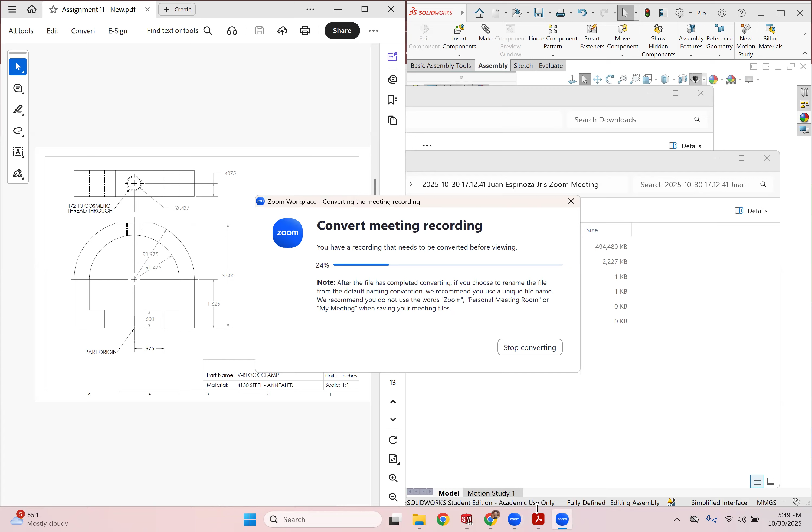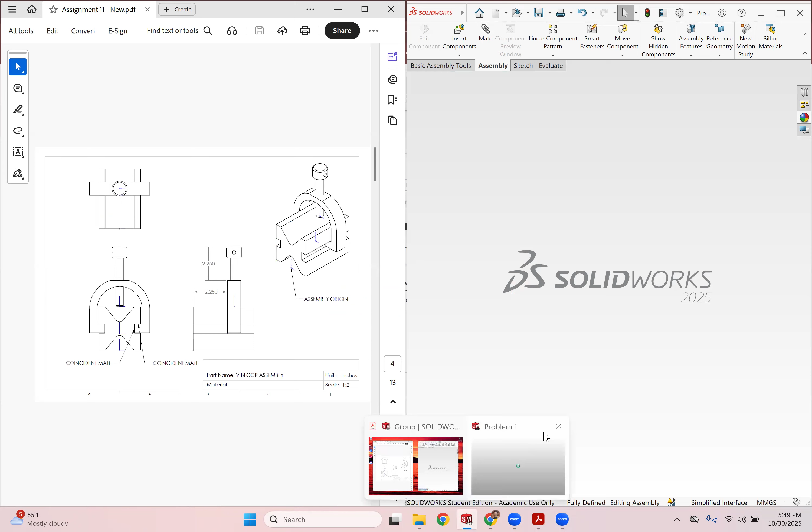Okay, so we can continue to problem number 2 now. I am able to minimize this stuff. Let me get set up here by closing problem number 1.

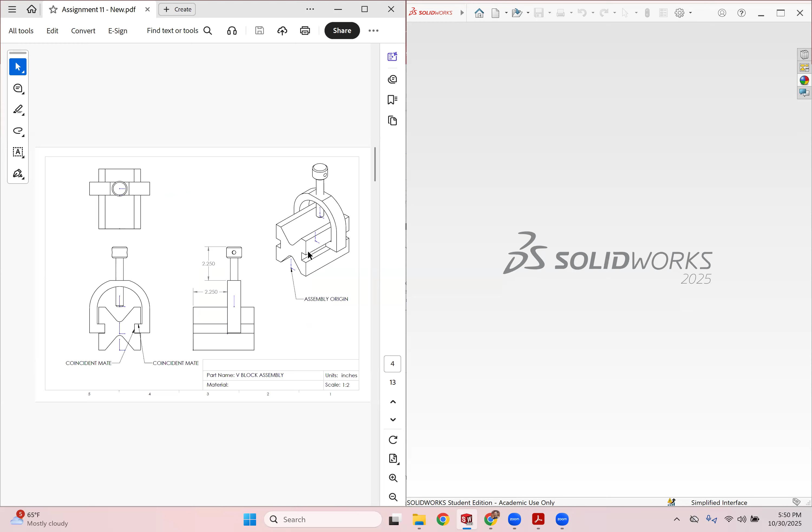So problem number 2 is a little bit different, right? We don't have our parts included or given to us, so we have to create them. So for the first part of this problem, let's create the necessary components, and then we can add them into a mate. So we do need to create the block, the slider, and the pin, or the clamp in this case.

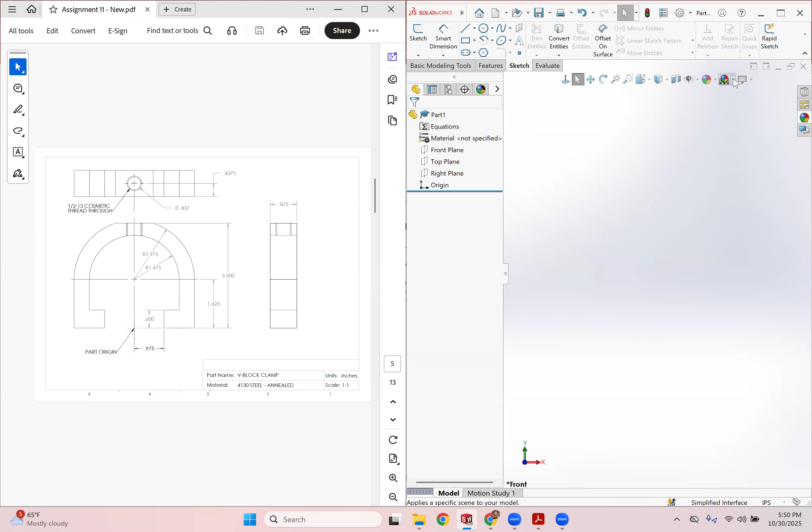So we'll go and create a new part file. Let me just make sure my settings are good for the recording. Cool. So if I make a new part file, our units are in inches, so let's make sure we apply inches rather than the metric system. Again, I like a plain white background. I should find a way to keep this as my default. I'll look into that later.

For this one, it's a simple part to make, right? We have one sketch, one extrusion for the base of it, and then we have a hole. So we should do a sketch on this front view. I believe it's already in the front view. Sketch on the front plane.

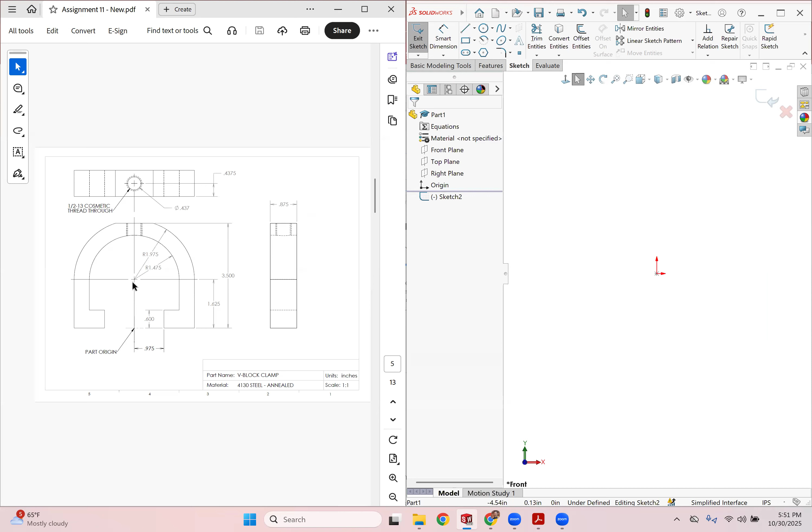And this is what we need to sketch. So I will select the center of this circle as my origin. So I can see there I have a circle.

Add a dimension. So the dimension here is a radius of 1.975. Now it's asking for my diameter, so I can do 1.975 times 2. So there's that, 1.975. I also have a second one, this one is radius 1.475. Again, times 2 for the diameter. All right, so those are those two.

I know from the, let's say, right quadrant, I have a vertical line. Now this line has a dimension of 1.625. Right, yep, 1.625.

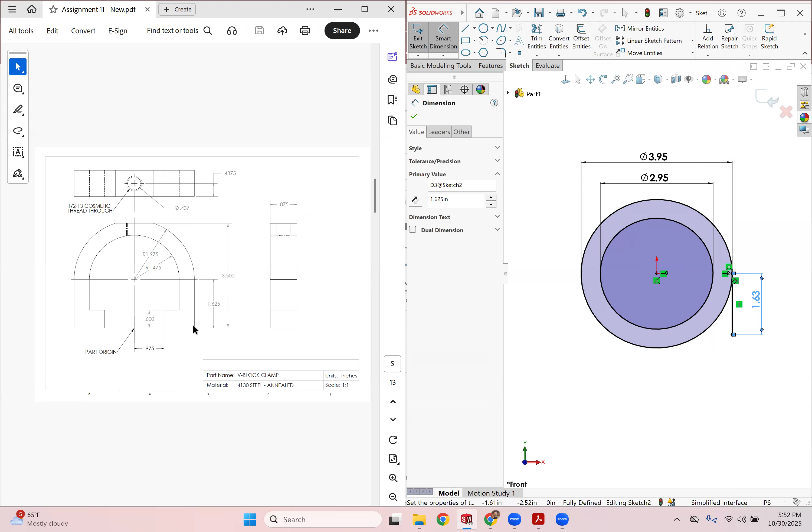I have an interior line. So from the right quadrant of the interior circle, again, it's a vertical line. And that one has a dimension of, if the total is 1.625 and we subtract 0.6, that would leave us this remaining distance. So for that, we should input, and again, if you don't want to do math, which in this case might be very simple, but if you don't want to, 1.625 minus 0.6, hit enter.

There's that distance. Now let's see, we have, can we find this vertical distance? Sure, we could by doing some math. So if we have this radius, right, 1.475, that would be the distance of the center, this point. Now, if that's 1.475, if we subtract this 0.975, again, that leaves us with our remaining distance.

So we can go ahead and create a line from the end point. Oh, my computer's lagging there. So we create a horizontal line this time. And again, that one would be dimensioned as 1.475 minus 0.975. And continue this with another vertical line. Now this one has a dimension of, I'll clean these dimensions up in a second, 0.6.

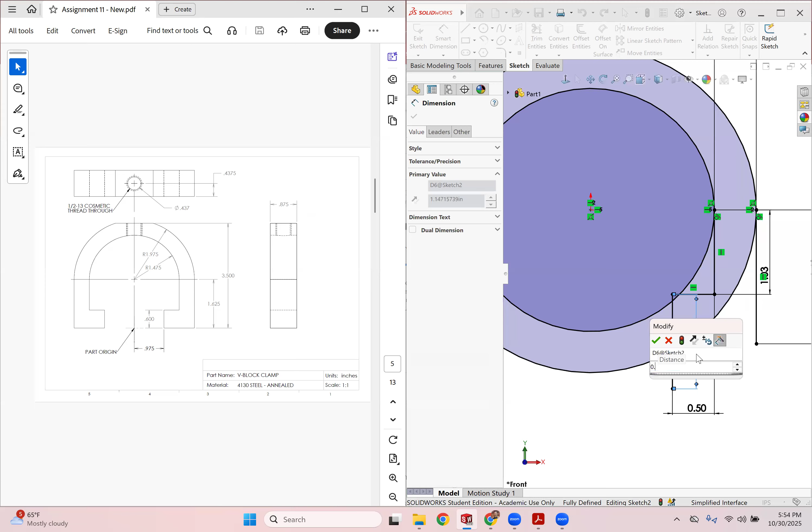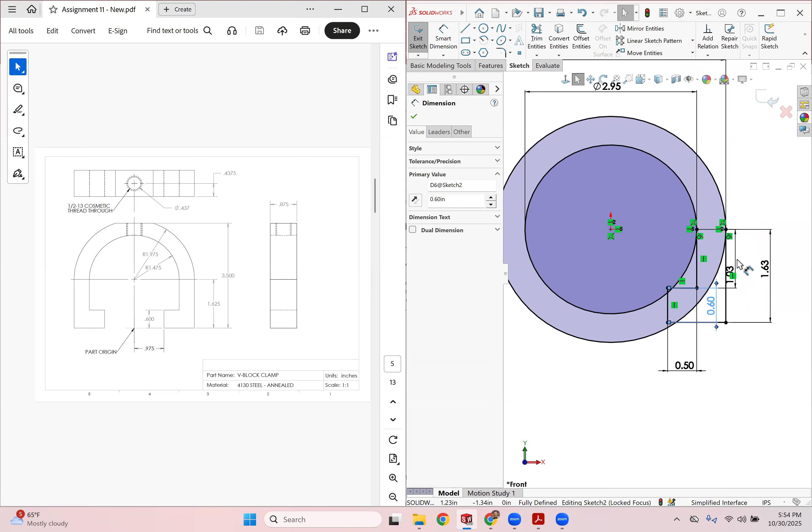Okay, then finally I can connect these two lines together. Move these around a little bit. All right, so that's the shape that I need, which basically means I could trim. What I don't, let's refrain from trimming first. What I would want to do is let's create this on the other side.

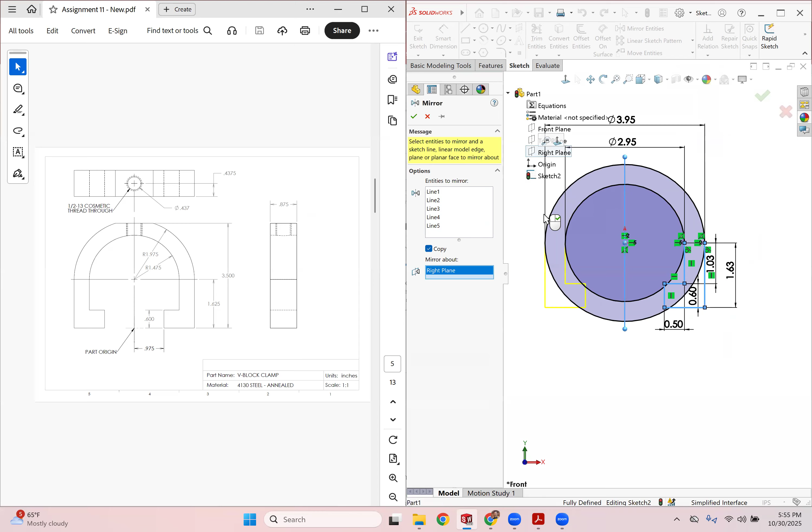Now you can do that manually if you like, or the smart way to do it would be with a mirror. So let's find my sketch tools. I'm in my sketch tools. Let's find mirror entities. Well, what do I want to mirror? I want to mirror this line, this, and this. This is what I want to mirror. Of course, I want to copy it so I don't delete the originals. And I want to find a plane where I can mirror this about. So if I hover over my different planes, in this case, it would be my right plane. I want to mirror these over my right plane, hit OK.

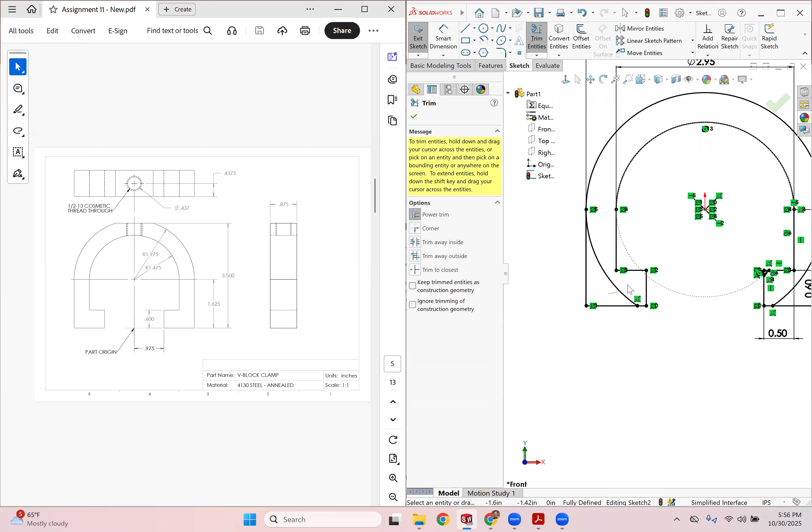Now we can trim. So let's find trim. Let's trim the power trim. I could trim that. I could trim here and there, where you get everything from there and there. Okay, so if you trimmed it successfully, we should have that finished.

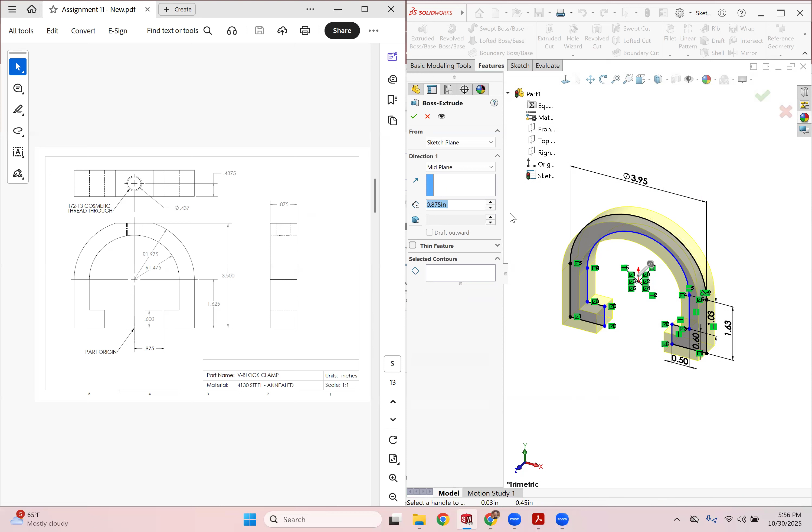Let's extrude this. So if we go to features, straight from our sketch, we'll go to features. I will extrude this the distance of 0.875. So we can do blind. We'll do backwards in this case of 0.875, or you can do mid-plane, which is fine. I personally would prefer that, that way we can keep some level of symmetry with our planes. If I do this in a mid-plane, then that means that my front plane is still symmetrical to the part, right? Splits it down the middle, which maybe not 100% required, but just to keep things kind of neat and organized.

I see a mistake I made. I forgot this flat top. So as always, you can go back into your sketch.

Let's go ahead and introduce that line. So see, it has a dimension of 0.35 - I'm sorry, 3.5.

So what I could do is make, let's say, a midpoint line, making sure I use the origin as a reference to make it vertical with that point. I don't know its distance, I don't know its size quite yet, so you can always just select something that works for you.

And then I can dimension this line vertically, right? I could either dimension it as this original dimension is from the bottom of the part at 3.5, or I could dimension it from the origin if I do a little bit of math.

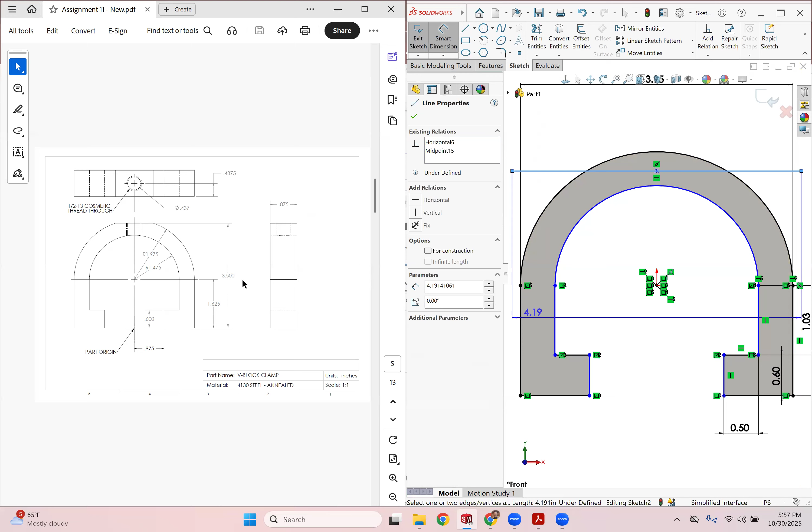But I'll keep it simple - let's just dimension it off the bottom of the part. Let's see, I would over constrain it. Okay, so this one should not change because it's over constraining.

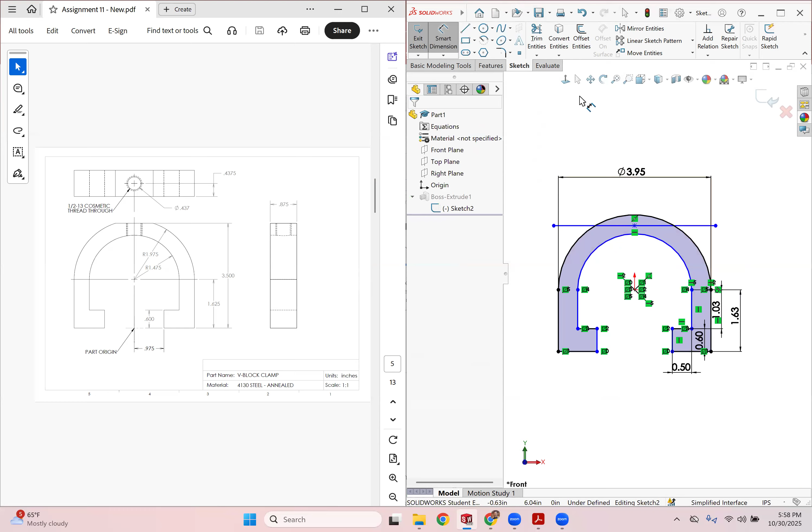Let me try - I want to try to maybe click on the bottom first and then the top. Might still be the same thing, which it is. Okay, let's cancel this, it's not useful to me.

What can I do? So this has to be horizontal and vertical. Will it let me dimension it from the origin? Maybe not. Will you? Okay, it does in this case.

So in this case, let's say we add the dimension from the origin. It would just be a little bit different, right? Instead of 3.5, we would do the total distance 3.5 minus the 1.625.

Just to verify that that's correct, which it should be, what you could do is just quickly check now the dimension, which is 3.5, right? But again, I cannot create this without over constraining that.

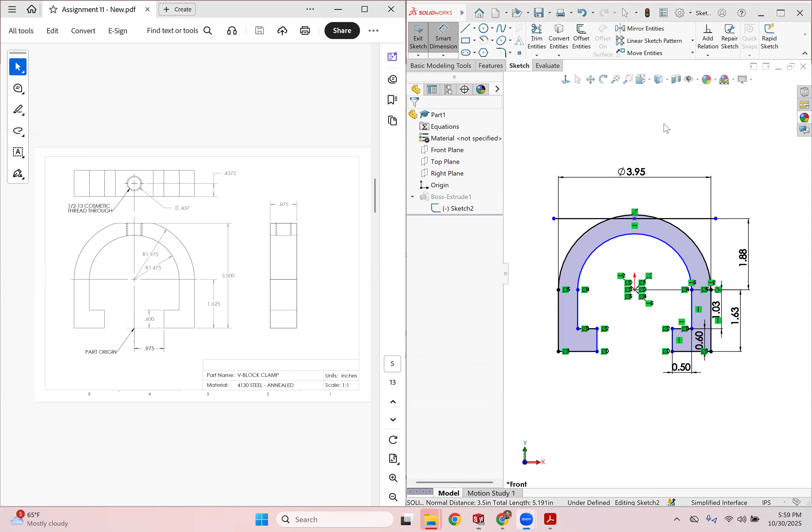So finally, again, just trim - now that that's in the correct spot, we trim all the unnecessary lines. Hit OK, try to back out. Cool, now I have that added in, right?

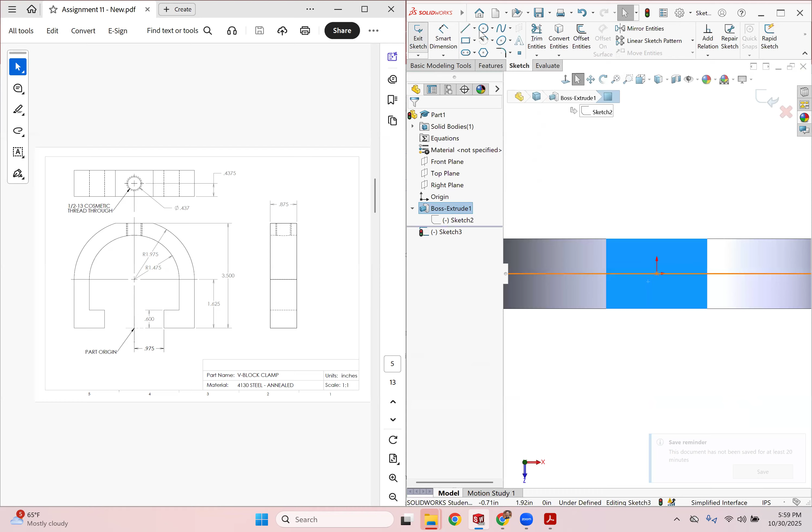And what I need to do now to finish up this part is the cosmetic thread through this hole, which I don't currently have. But if we did a sketch on this face - I'll do a new sketch on that face - we can create our hole by creating a circle about the origin.

This one should have a dimension of 0.437 in diameter. So there's that hole.

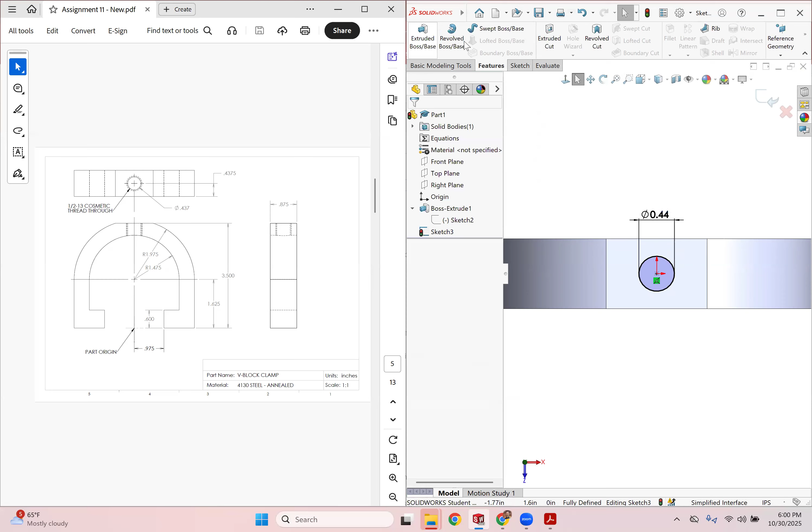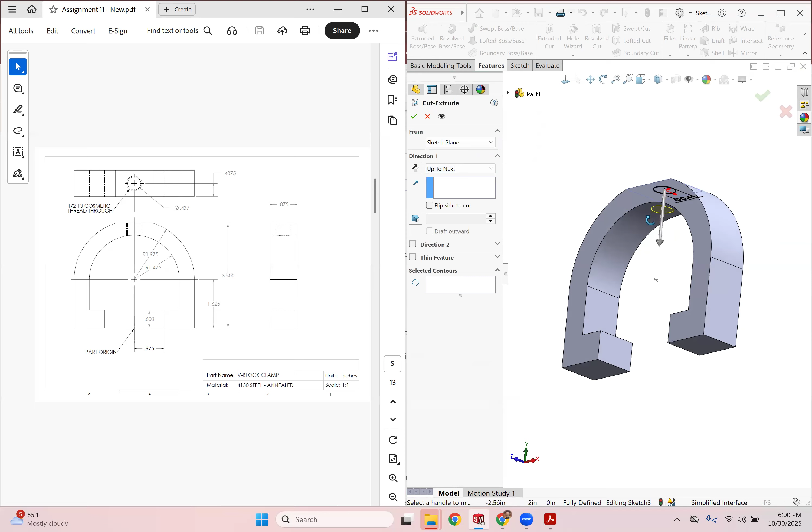Go ahead and finish this with an extrude cut. Now it doesn't give us a distance, which is fine. However, what we could do is enter a blind distance that goes all the way through at some point. My recommendation for this one would be up to next, so regardless of where that next is, it'll cut all the way through. So up to next works fine in this.

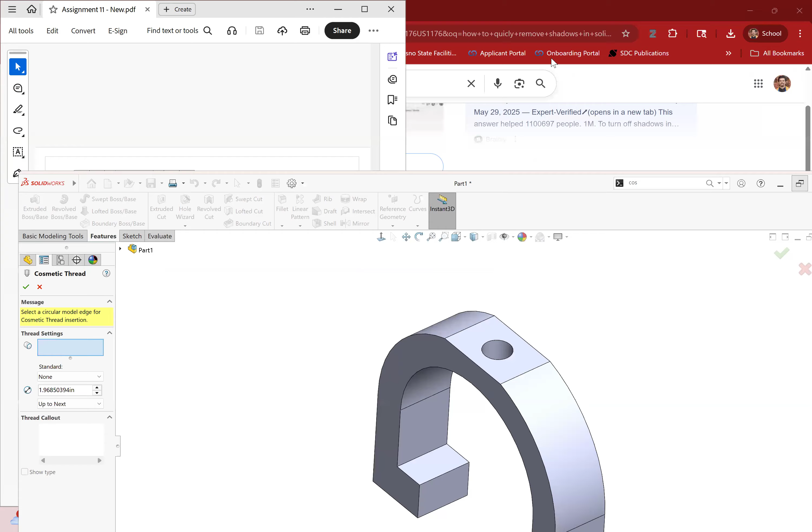Now I just need my cosmetic threads, which - let me go ahead and full screen this to type in, I believe there's an actual tool called cosmetic thread. Okay, now let me minimize this to put it back. All right, so this is my cosmetic thread tool.

What it's asking for me here is the edge of the hole. So this is the edge of the hole that I want to thread. Standard for the standard units should be - let's try ANSI inch.

Machine threads is fine. In this case, I have half by 13. Let me try to locate half by 13. It's not on here, it's only half by 20.

Let's try a different standard, maybe ISO, which is in metric standards. Let's find a standard that works for us. Maybe we could do none. No, that's not gonna work. That's also metric, more metric, more metric.

Let's go through these. Don't think it's gonna be a straight pipe thread. Half dash 13 - no, HeliCoil is not it. I don't even know what that stands for. KS, JIS. Let me find a standard that works for us in this case, and I'll get back to you.

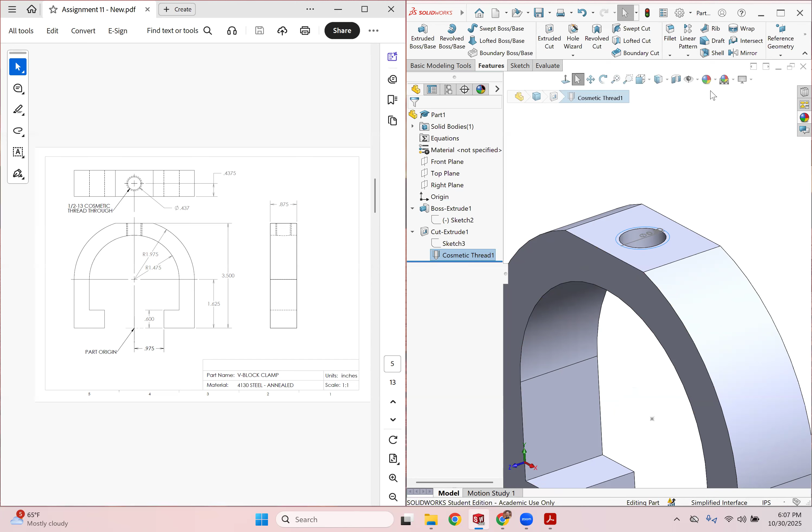So I believe that's it for this component. Let's go ahead and save this.

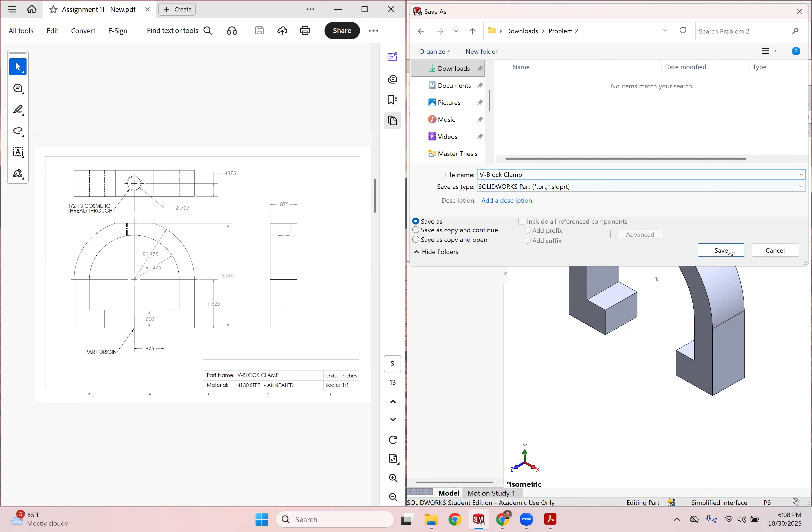Save this to downloads or somewhere that works for you. Make a new folder because we have a few parts to make here. Call that folder 'Problem 2' and save it there. This part is called the V block clamp, file number 2. Go ahead and save your work there. You don't have to close the other file if you don't want, but my computer is running low on memory, so to help me, I'm going to close that since we're done with it.

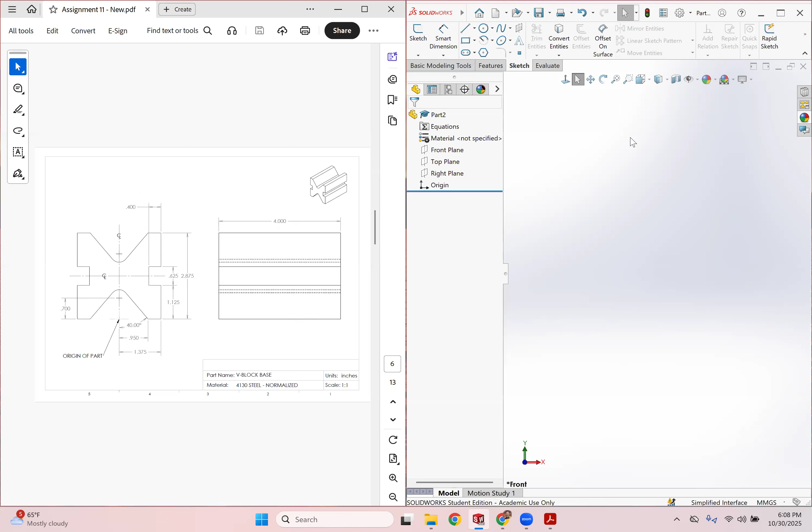Now let's make this part. Again, open up a new part file. Very simple component: one sketch, one extrusion, sketched from the front view again. I believe we already have a sketch on our front view, but just to verify, sketch on the front view again. I like the plain white background with no shadows. Let me zoom in here.

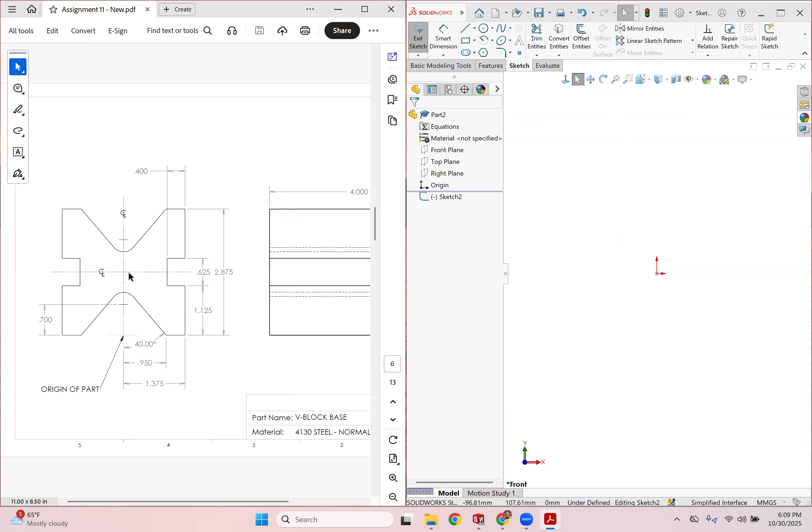Here's the sketch that I want to make. Again, I would personally select my origin to be in the middle, but it's up to you what you want to do there. So if my origin is in the middle, let's say I can start with these arcs. Do I know the distance? I'm sure I can find it somehow. Okay, it's going to get a little complicated, but I could find that distance.

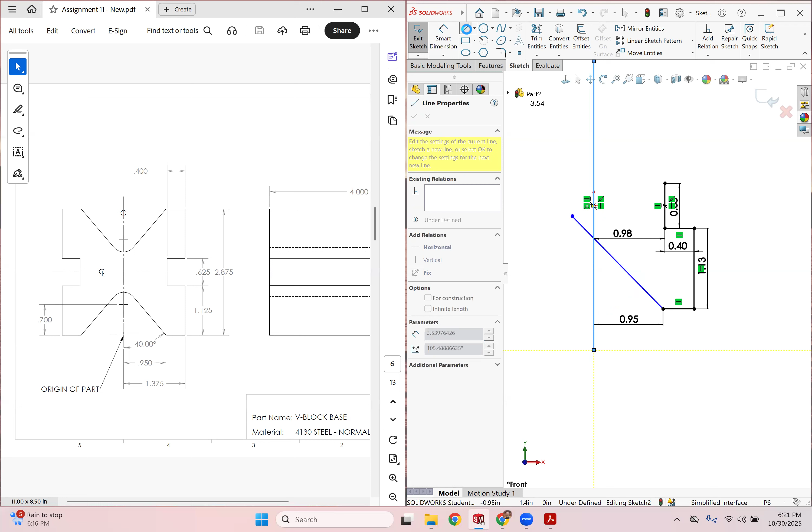So what we could do is make a reference line. I like to use a midpoint line in this case, and make sure it's vertical. Distance isn't really important, but what is important is that this line is for construction. It's just for reference, not actually a part of our drawing. We just need it, in this case, to add a dimension.

So this angle here should be 40 degrees. Very nice. And we need the same line in the opposite direction.

So I think for now, what we could do is finish the right half of this drawing. From here, we could basically just mirror everything. We've essentially made one quadrant, and in this case we have symmetry in the X direction as well as in the Y, so we can just mirror twice for that.

For example, let's say in this case we want to mirror this line, this one, and this one over the X direction. So we're going to mirror about... let's find the proper plane for that. So over the top plane in this case.

Now what we should do is mirror all of this over the Y direction. So for mirror again, this time I just want to quickly select everything. You can use your selection tools for that.

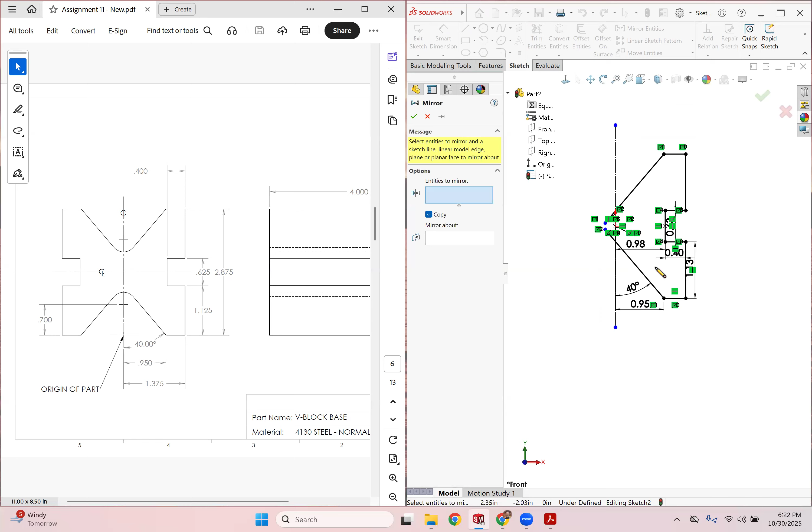Let's see, what line is this? I'm going to deselect that. The reference line isn't really too important to the drawing, so I don't need another version of it, especially if it's going to be in the same location it's at now.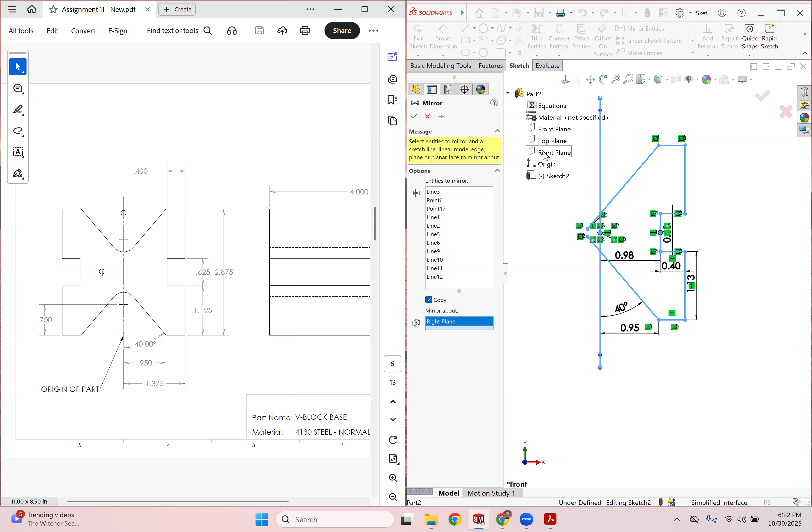We want to mirror this over the Y, so in this case the appropriate plane would be the right plane. Yes, we want it to be a copy. Finish that, and then go back in here.

Just to clean this up a little bit, maybe trim these pieces. Oops, I didn't mean to trim my reference line. So what I can do there is just extend it back into itself. We're one piece now. Sweet, we're one piece.

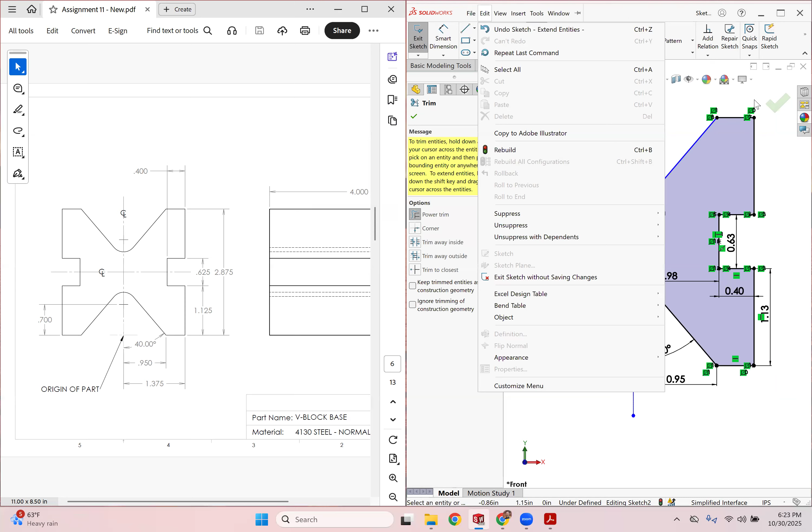What do we need to do now? Now we need to finish the arcs. The way I would do this is the radius or diameter is not explicitly given to us, but we can create a circle in this case on the reference line.

Now again, I don't know exactly its radius or diameter, but I do know that circle is dimensioned. I actually did this backwards — you don't start with the circle first. We could do, let's say, a point. We don't get to use the point too often, but we need a point here.

So somewhere along this line there's a point, and that point has a dimension of 0.7 from the bottom of the component. So this dimension here should be 0.7. Now we need this point so we can use it as the center for our circle.

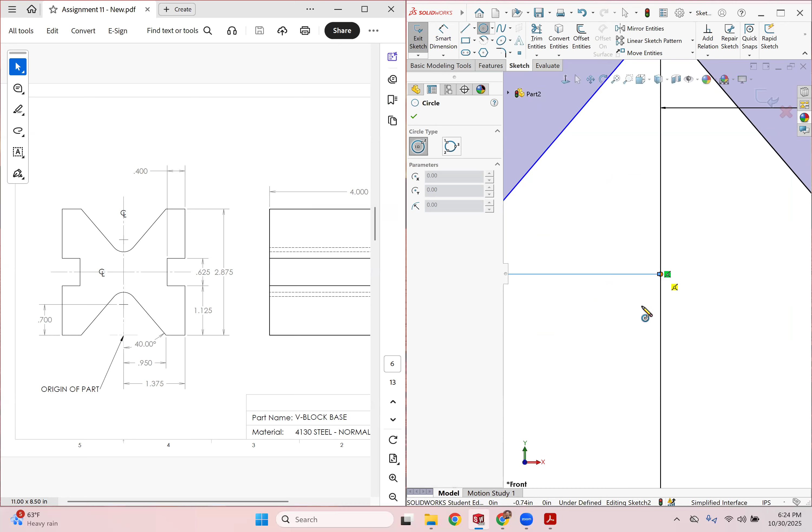Now that we have our point there, we want to make sure I lock onto that point. Now this circle, from this point, make it tangent with one of the lines that we created. Doesn't matter which one — since it's in the middle, it should be tangent to both at the same time. So this is the radius that we need, but again, it's not given to us.

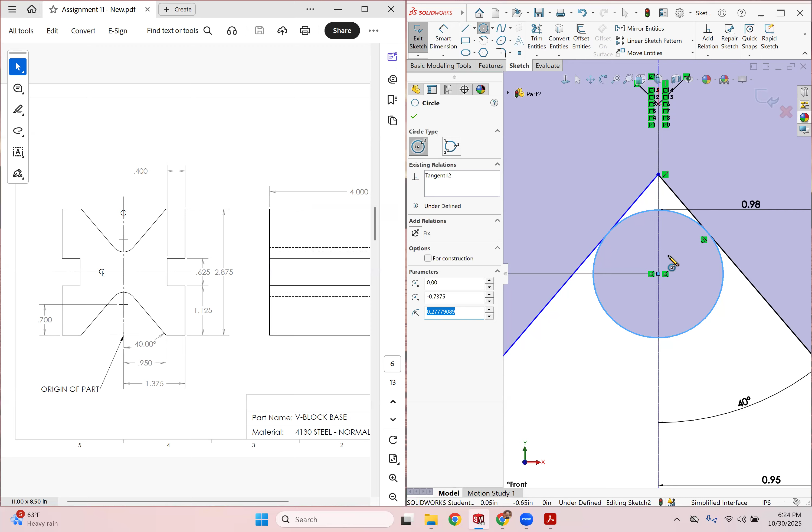So from here it's pretty simple. We just trim what we don't need — in this case these two pieces — and then we have our arc.

Now you could do that to the opposite side. Again, use your tools — a mirror would help us out in this case. We want to mirror this arc about what plane exactly, I'm not sure, but we can hover over them to find out. Over the top plane in this case. There you go. As always, trim.

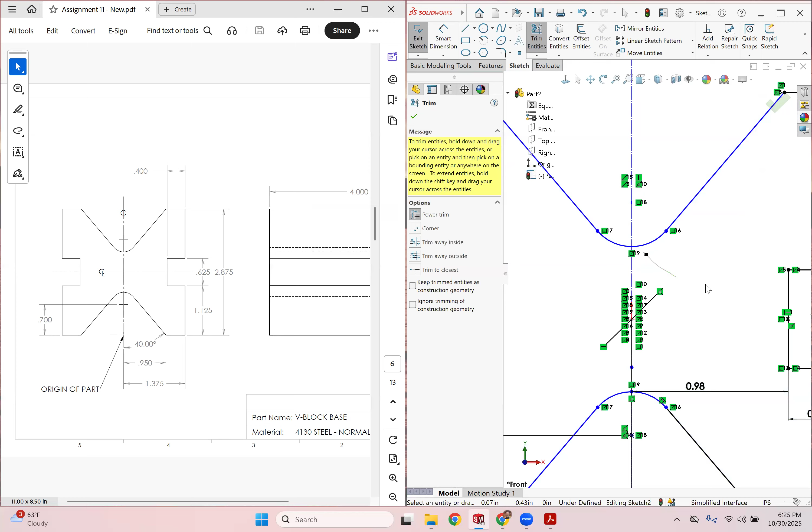And there it is, so that would be our final sketch. All we have to do now is simply extrude in one direction, or again, I like to just keep it neat and do it mid-plane in this case. Total distance is 4 inches. Go ahead and finish that.

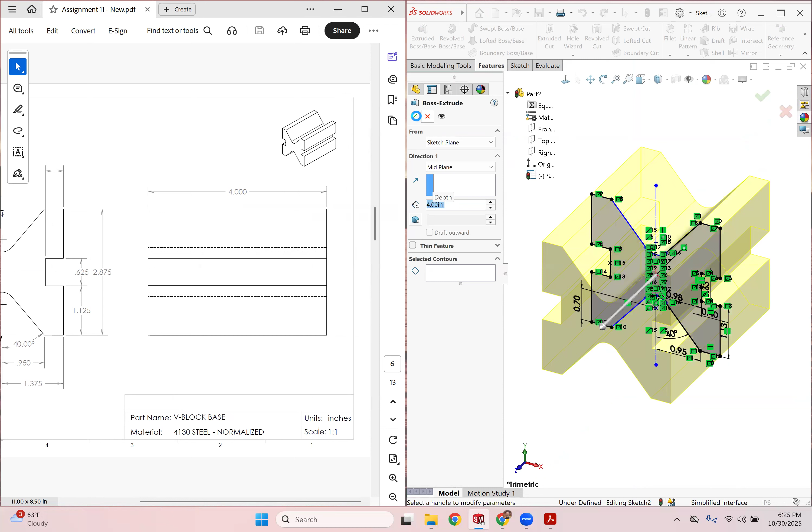So that's the finished component. Save this as VBlock base in that same folder. If I go to the folder that I made, I could even click on this since it shares the name, sort of, VBlock base.

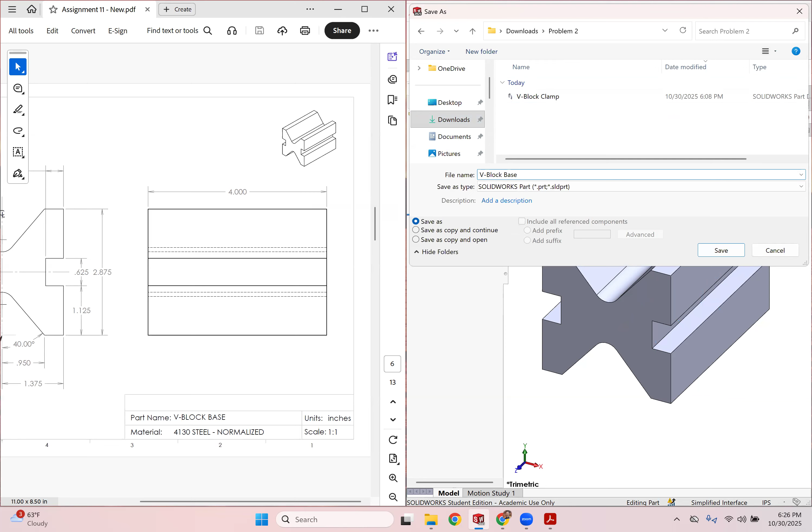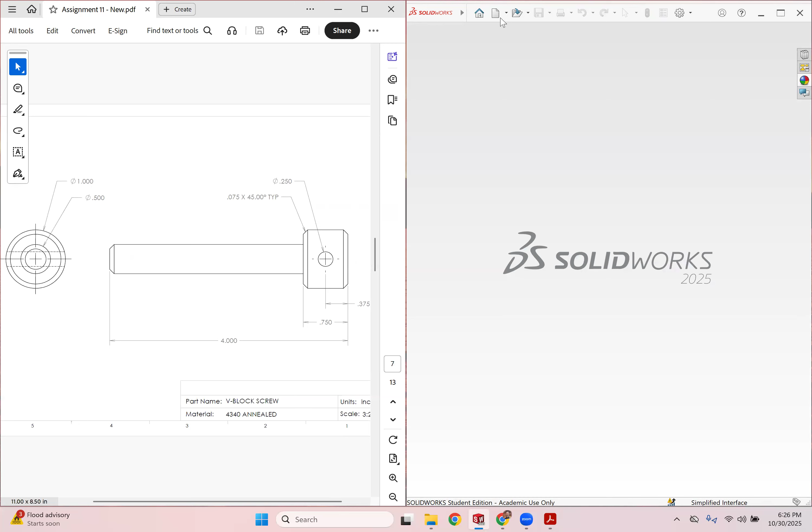So that was the second part of this assembly. Now we just have one more, which is the V-block screw. Let me save this to spare my memory, and make a new part.

Plain white, as always. This one, to me, would work two ways. I could revolve it if I sketched out the cross section and revolved it, or in this case I could do a simple extrusion for the screw section and the head section. It's interesting, let's go with the extrude one.

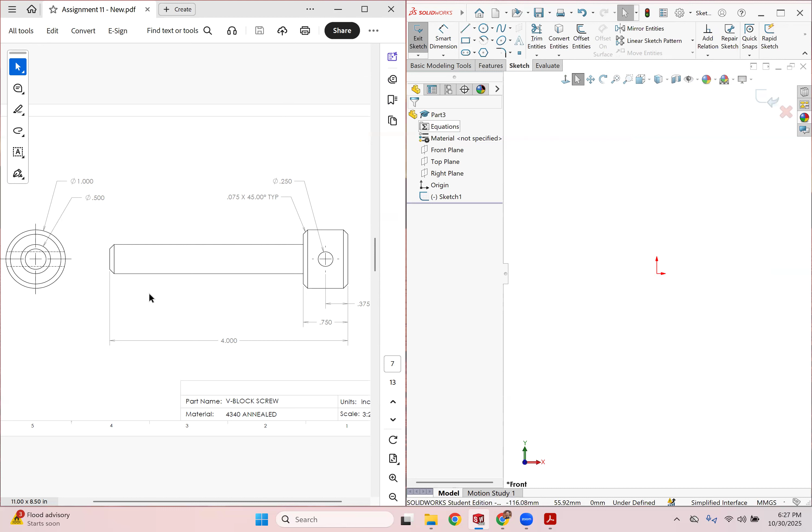Can't decide which. So in this case, this is my front, maybe this is my top view. Let me sketch on my top. I'll do a new sketch specifically on my top view. What I'll be sketching is the outermost circle and the one for the hole, so I have two circles. Before I do that, make sure you're in the right units, that would help out. Again, sketch, top plane, circle. I'm going to use the origin as my center point.

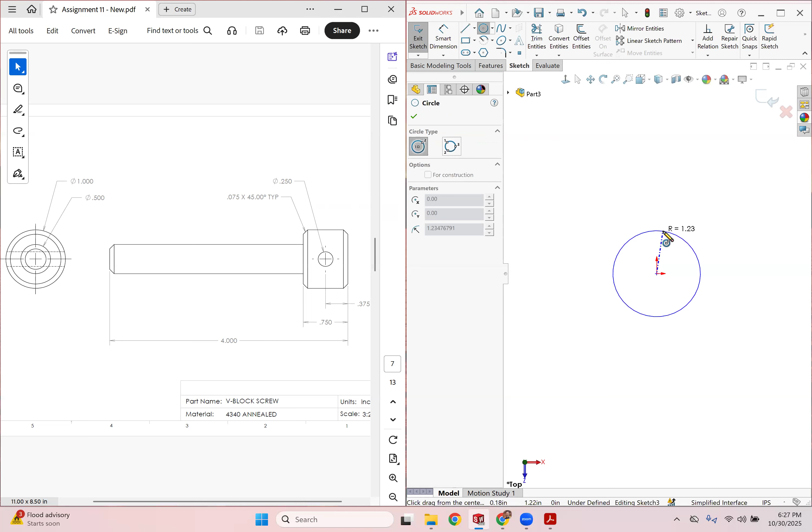This one should be dimensioned as my outermost circle, 1 inch in diameter. That's good. Let me do my second, which should be, it appears to be 0.5. Very well, that's it. Now we need to extrude this.

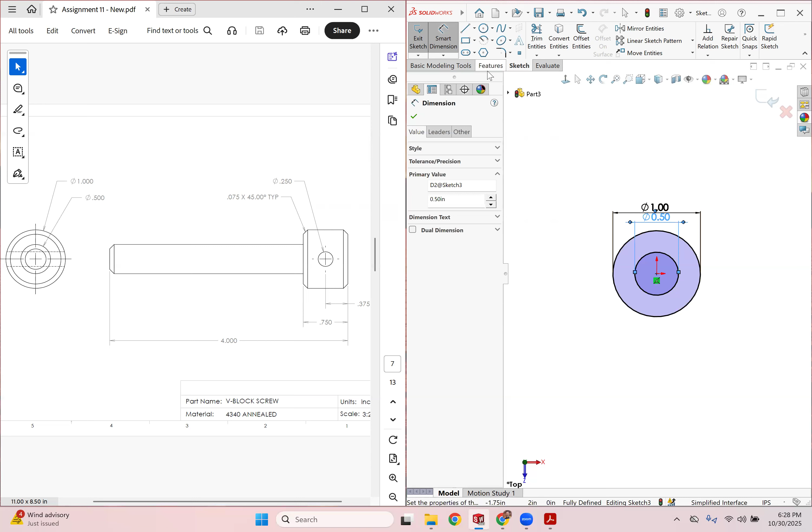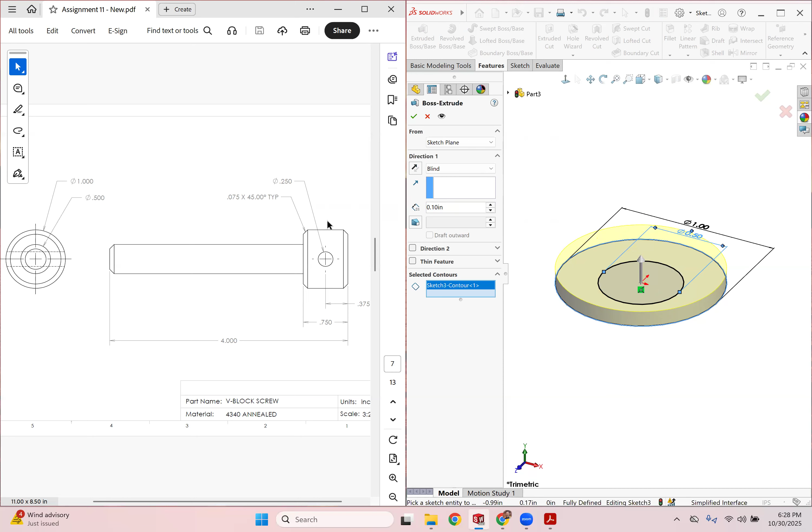In this case I wouldn't do a mid-plane, I'd have to do a blind extrusion. My first extrusion, let's say I wanted to do just the head of the screw, so I do the whole contour, not just a certain region, the whole thing. The distance would be 0.75. I'll go ahead and finish that.

And then I also need a separate extrusion. Again, you could always extrude based off the same sketch. So if I find that sketch I'm referring to, in this case sketch 3, this time I don't want to extrude the whole thing, I just want to extrude the center portion. Select that specific contour. The total distance is 4.

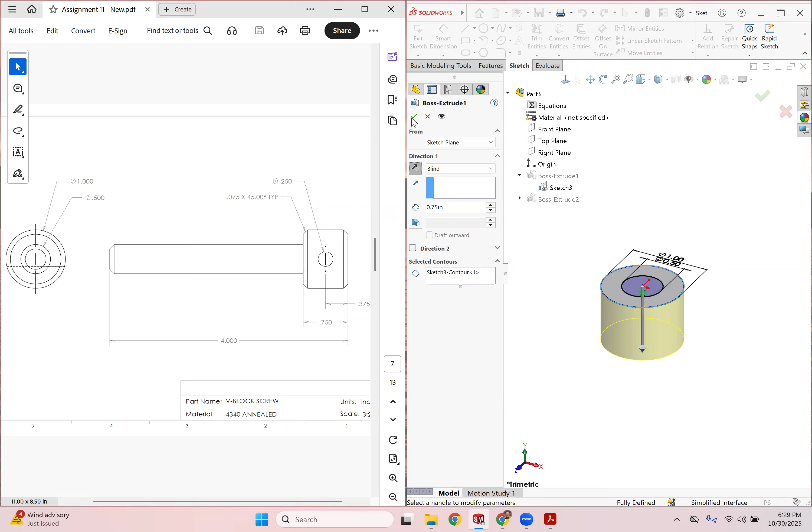It's actually, I want to flip the direction of this, just to make it go down rather than up, which I can do. Okay.

You don't always have to do this, but I like to be neat with my work. This comes more into play when you get into more complicated drawings or assemblies, but you could rename your features. In this case, I know this feature pertains to the head of the screw, so I can call this screw head. This specific feature pertains to the shaft of the screw, so I can call this screw shaft. Just all neat and organized in that way. If you have a bunch of extrusions listed off as extrusion 1, extrusion 2, extrusion 3, this is more clear and concise as to what feature pertains to what.

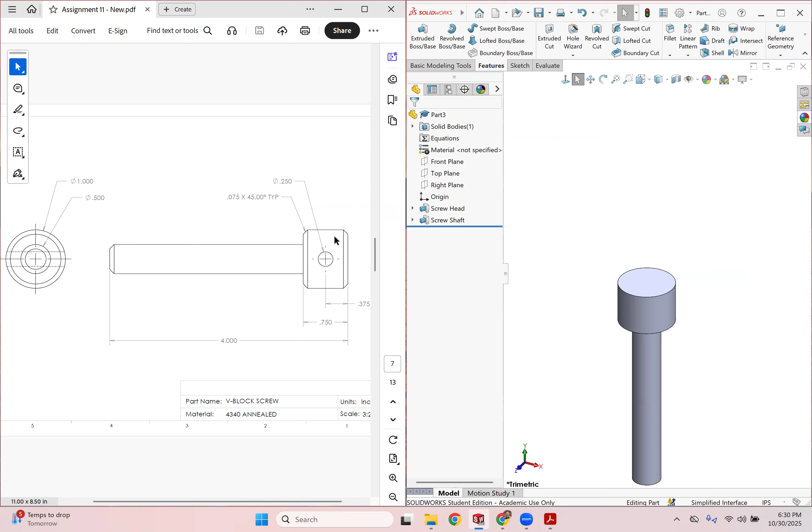What do I need? I need some chamfers. I have 3 chamfers given a distance and an angle. So if I find my chamfer tool, what do I want to chamfer? I want to chamfer this edge, this edge, and at the bottom edge as well. Now I have a distance-angle chamfer, which is my default, which is great. So I have a distance of 0.075, and an angle of 45 degrees. Hit OK. There are my chamfers.

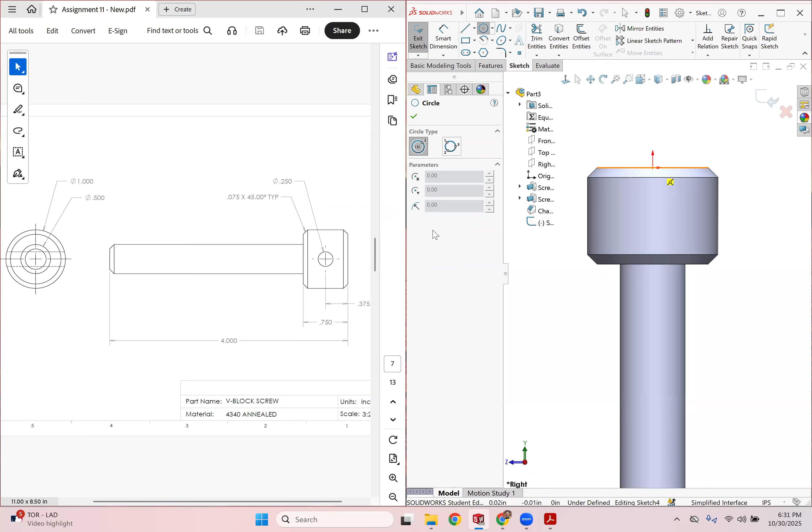Great, let's make this hole on the side here. So if I go to sketch, I'm going to do a new sketch, find a good plane for that. I'm going to call that my right plane in this case. I need a circle for my hole. Now it's dimensioned as 0.375 from the edge, so I can just make sure I make that vertical for now. I would believe you can also reference the center of the bolt head.

So again, this one should have a dimension of 0.375 from the edge. Diameter would be 0.25. Now just to double check, what is the dimension between this and the edge? Should be 0.375, which it is. Now it's just rounding it, but if I do it there, 0.375, perfect.

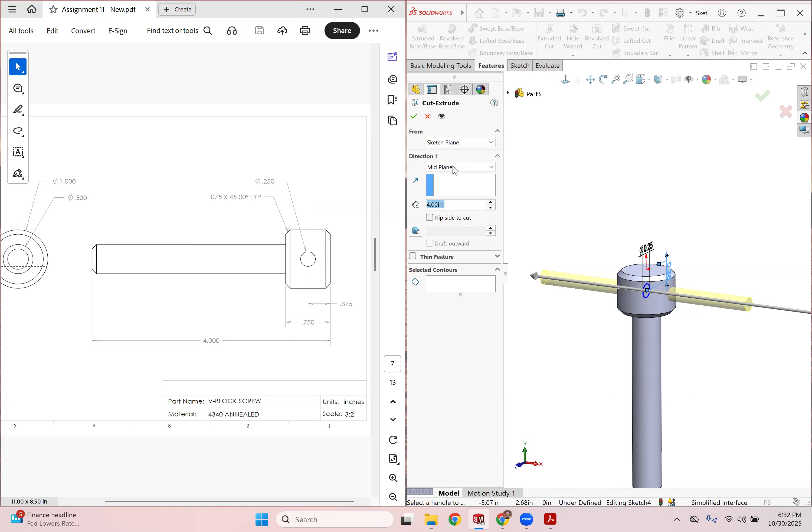Let's see, features, extrude cut. In this case, up to next works perfectly fine. But I do need to do a mid-plane since I sketched it on my right plane specifically, this would have to be a mid-plane. Or I can do through all both. If I don't want to enter a specific distance for the mid-plane, through all both would do what I need it to do. So now I have a nice clean hole through the part.

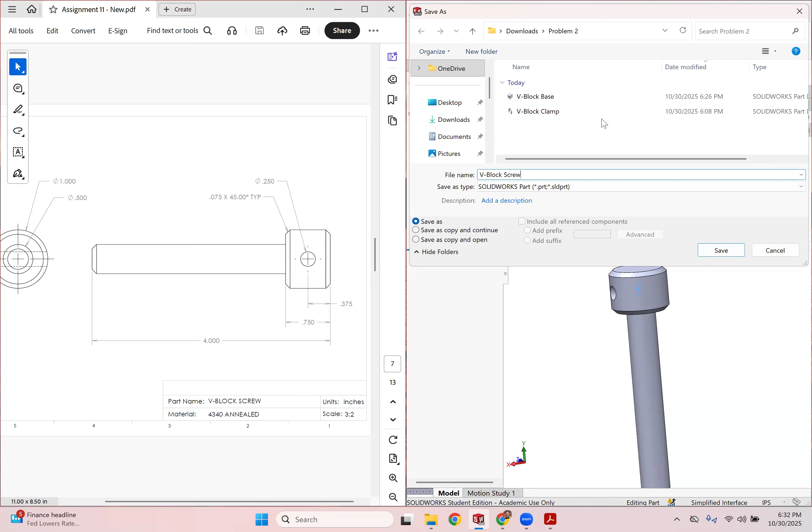Let's see, is that threaded at all? Nope, that is it. So let me save this as a V-block screw. Save that. Okay, again, I won't need this at the moment so I can close it, save on some memory there.

And let's go back to our assembly file.

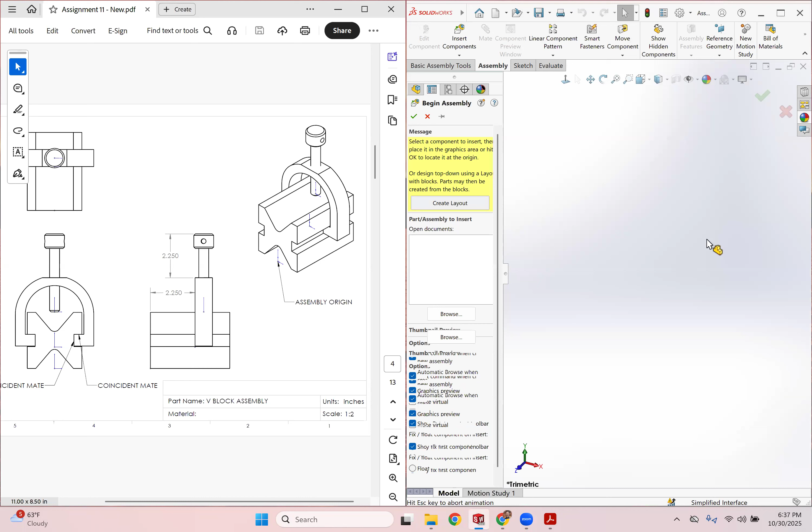We need to insert our components. The first component I would start with is the base, because that one should be fixed. So I'm just going to insert that first, and then follow that up with the clamp and the screw. So I'll have the clamp now, and I also have a screw.

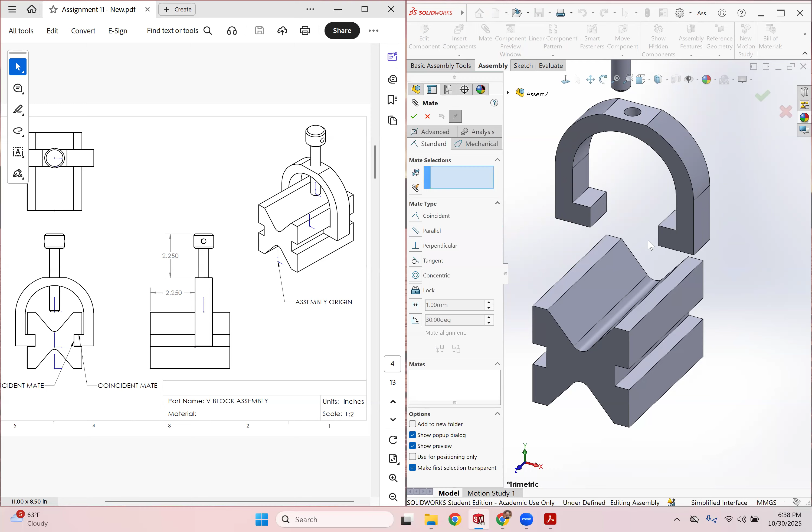So there's that screw. First things first: our base is fixed, that's good. This clamp can still move around. Let's add a mate. What should we mate? This edge, no wait, not the edge. You see this face should be mated with this face. So that's one. Now those faces are mated together.

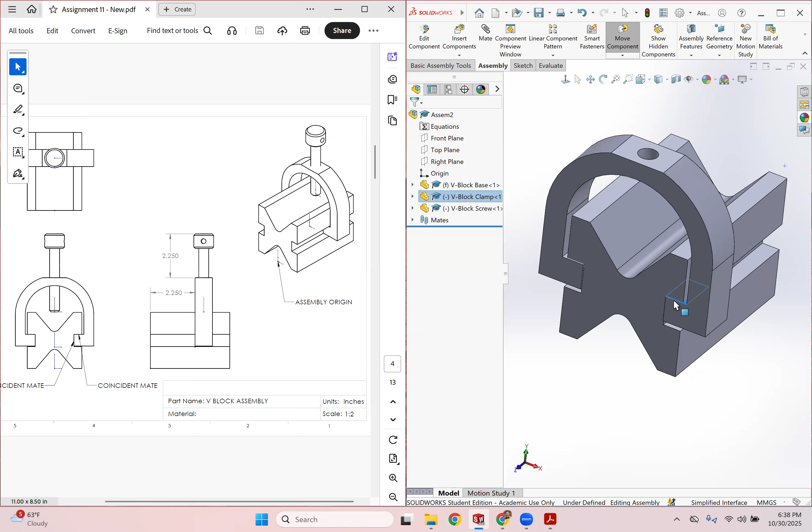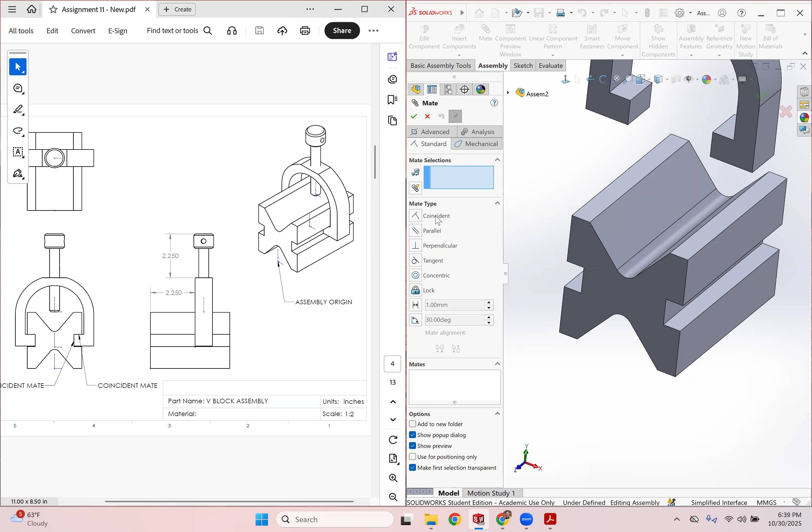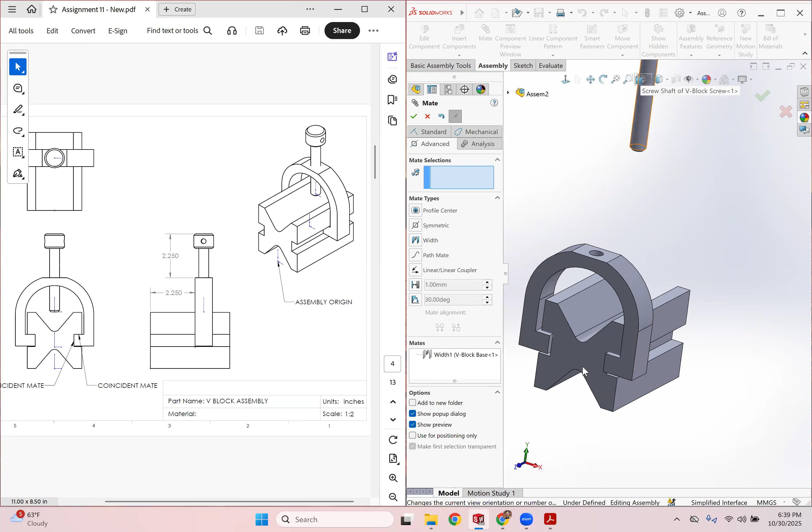You know what, I'm going to do something a little bit different. I'm going to introduce an advanced mate. One thing I know is that this clamp theoretically should be split down the middle when applied to the base. Meaning if I do a width mate, I want to make sure it's equally spaced. So these would be my first two selections. I want to make sure all these selections are equally spaced in width. So that width mate is going to make sure, and I'll show you what that looks like in this direction. So those two faces were mated up to each other, but I like the width mate better on this one.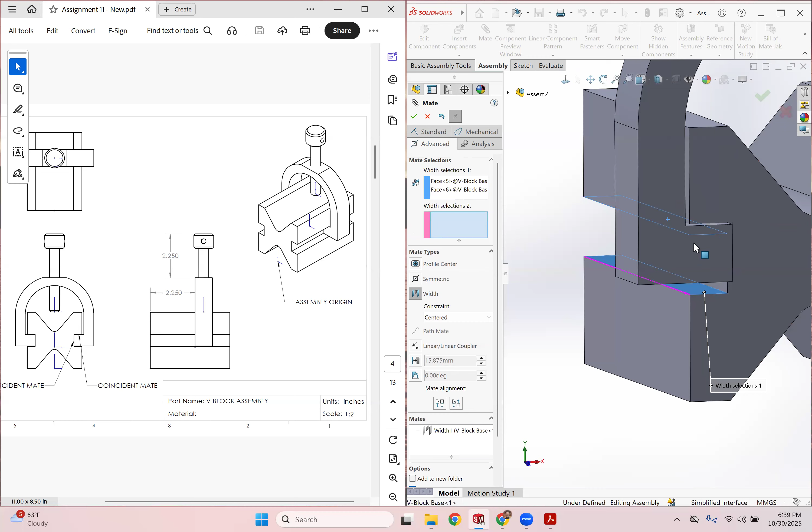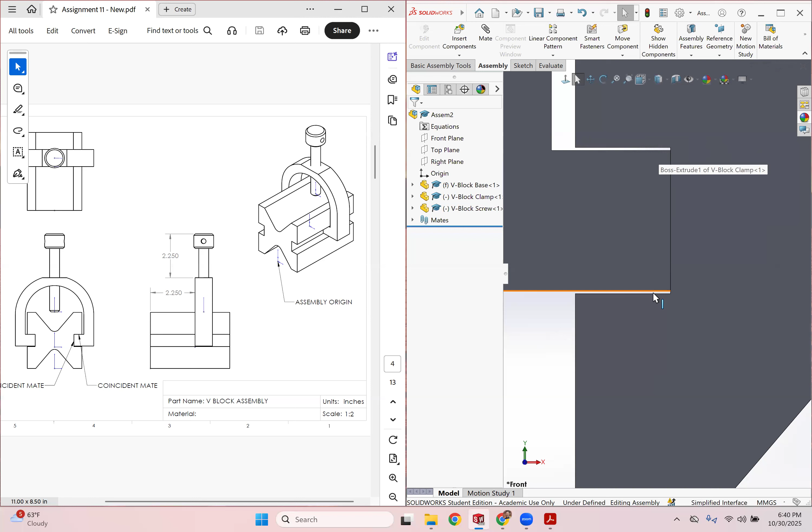And we also need to do a width mate for, let's say, this space. Oh, I can select that. Let me zoom in on the back here. So this distance needs to be separated by these two. Let's see, that's what that looks like in this case. And that's why I did a width mate in this case, because if I mated these two faces together, you would have had a larger gap here. So just to be a little bit more precise, we're assuming this is there.

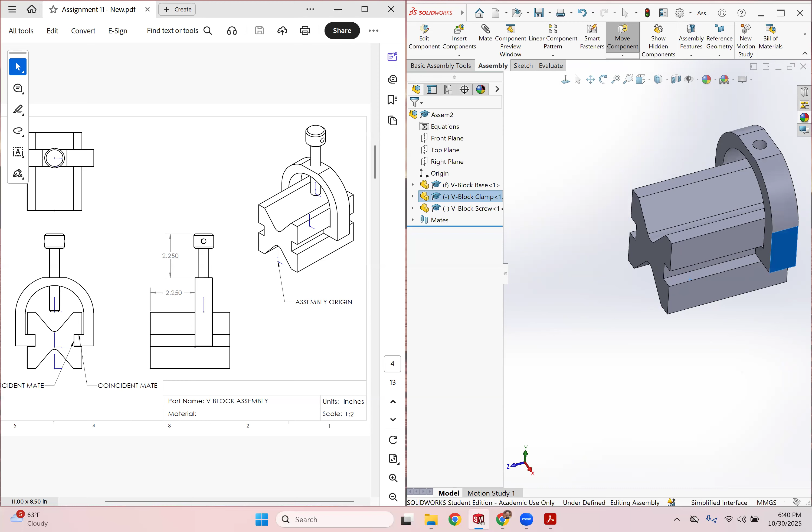So now we should have a proper articulation of the clamp in our base. But as you can see, the clamp is able to be removed. Let's see, what is the problem? Let me read the problem statement for this.

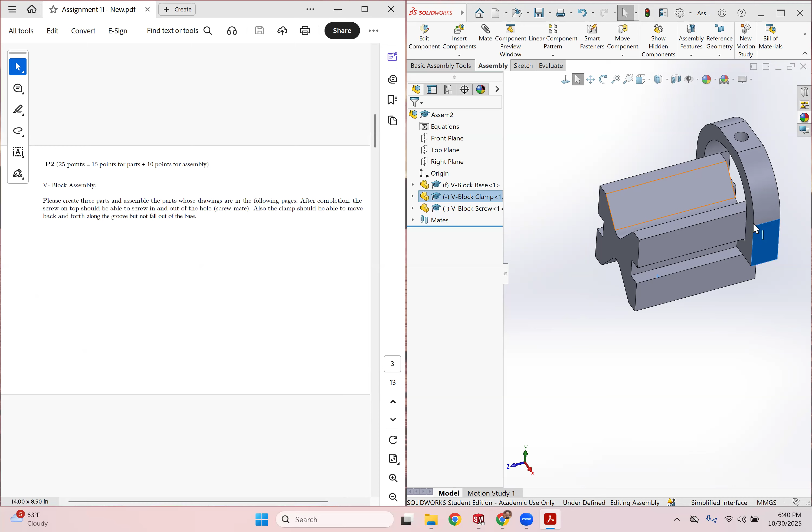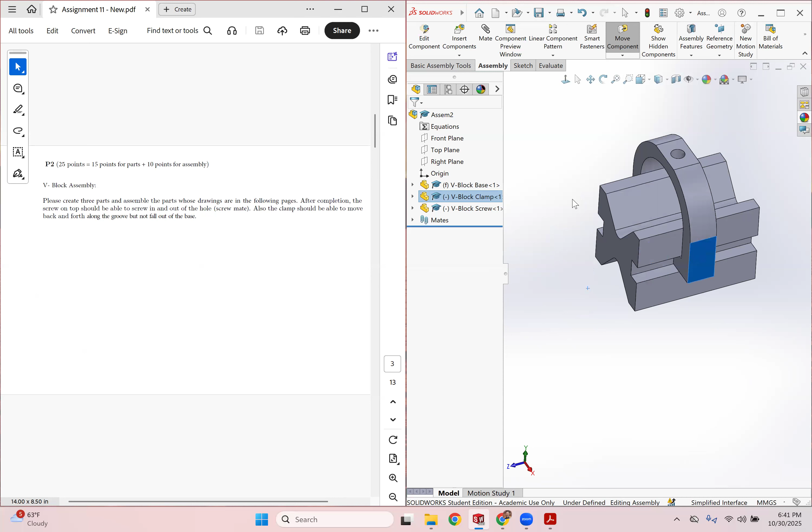So create 3 parts and assemble the parts in the following pages. After completion, the screw on the top should be able to screw in and out of the hole screw mate. Also, the clamp should be able to move back and forth along the groove, but not fall out of the base. So in this case, we just want to make sure this doesn't happen, it's just going too far out. In real life, the screw itself would be what's holding the clamp onto the base, but in this case, just to show you guys some more mates, we want to make sure we constrain this to not be able to move past the clamp itself without the screw.

So the way you would do that is we need to do some sort of limit mate. I believe it's a distance mate, since we have distance mates and angle mates. For your limit mates, you need to go to the advanced section. So I want to find an advanced limit for the distance. What do we want to limit exactly? I would say in this case, you could limit... let me find a plane. Oh, that's why I need a plane for my V block. So my front plane in this case, and my base. So these two need a limit mate.

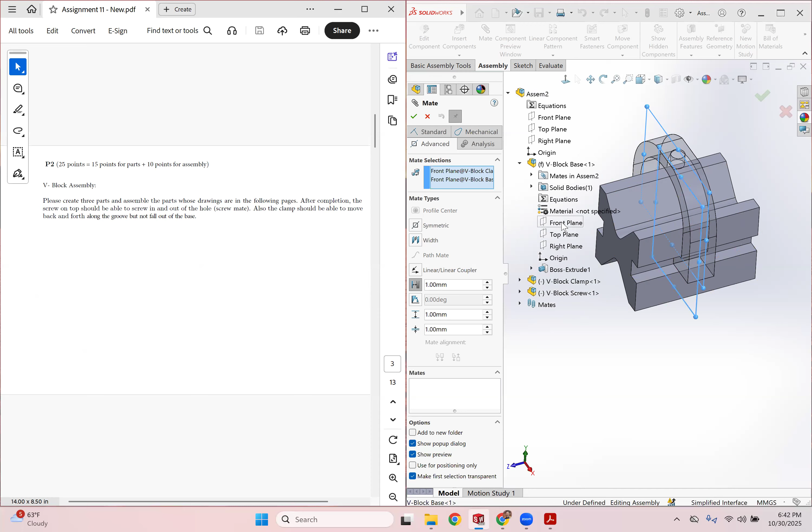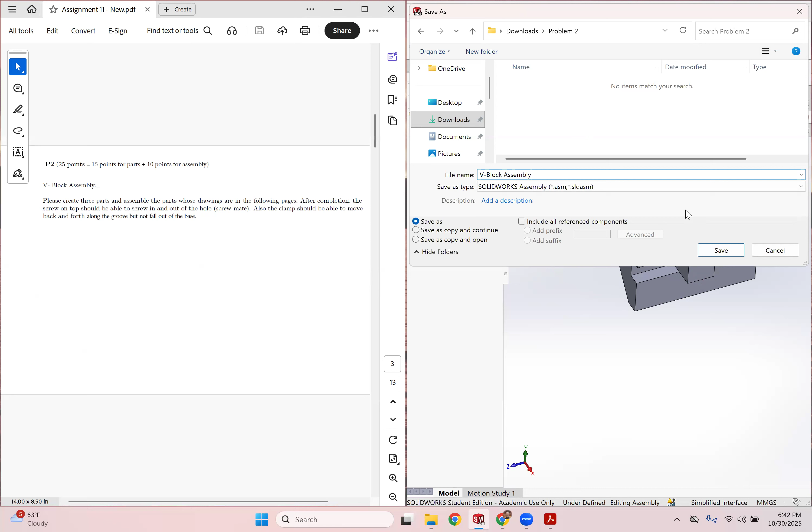Already have it. Let me save this just in case it crashes. I'm going to do no, close this, let me save my work. Yes, rebuild it. I'm going to save this in the folder where I have problem 2 stuff. So what should I name this? V block assembly. Okay, V block assembly. And just save that. Okay.